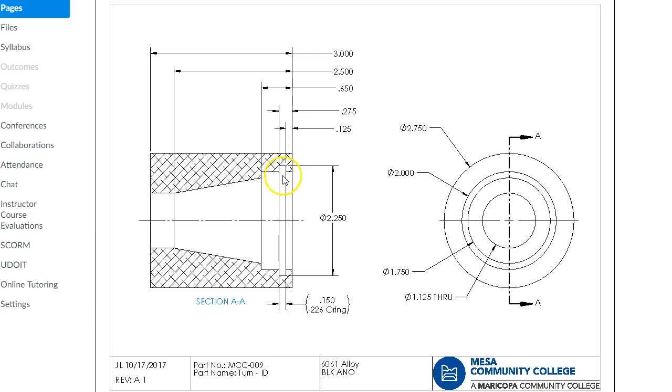I made up a turn part for assignment 9, pretty much a tapered through bore, outside diameter 2.75. First step is 2 inch, the 2 1/4 to the O-ring, and the O-ring is just for reference. Pretty much we're going to do the facing operation, center drill, drill through, then start boring out the internal geometry, and then last will be the O-ring groove.

So two things we need to be aware of is we draw the geometry in the normal coordinate system XY, and let's go ahead and generate the first part. And I showed you the offset lines and being able to generate that rectangle, treat it as a different level, and then trace over top of it at the end of the last video. I still lean towards doing the point coordinates, or at least that makes more sense to me.

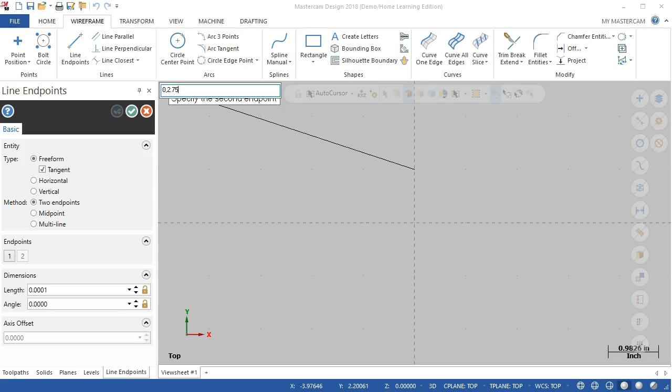So one of the things to be aware of is that once we activate the lathe, then the coordinate systems shift to a D for diameter and the Z direction. So to contrast those, we're going to start at 0 and let's see, 2 inches for the diameter, 1 inch in Y. And then 0, our OD was 2.75 divided by 2. So that gets us to the start. And we would go 1.375 comma minus 3.

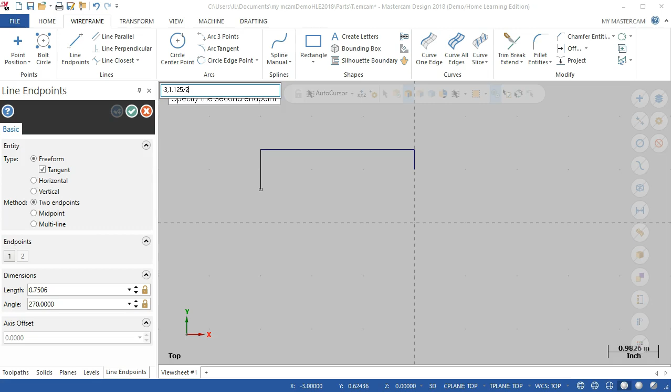Oh, got those reversed. Alright, so in point, we'll try minus 3 comma 1.375, and then our endpoint would be minus 3, and we have a 1.125 for a bushing. I didn't call out the sleeve bushing, but it has a press fit, so 1.125 divided by 2. Okay, so we'll go ahead and accept that.

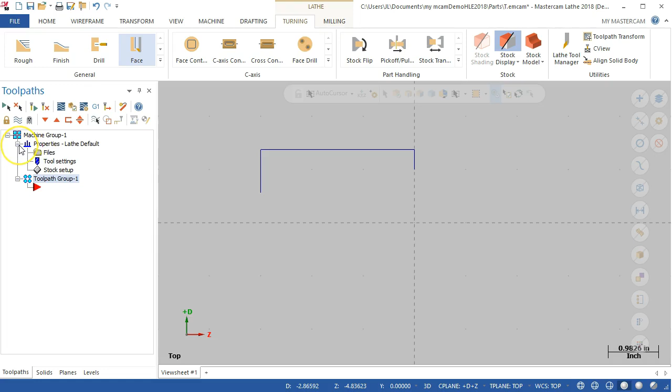Now in contrast, if we go over to the machine, notice that we're in the top XY, go over to the machine and we pick the default lathe, that the coordinate system shifts to the diameter and the Z direction. So all of a sudden our coordinates are changed, well, translated. Anything that we would put in, we now kind of have to reverse.

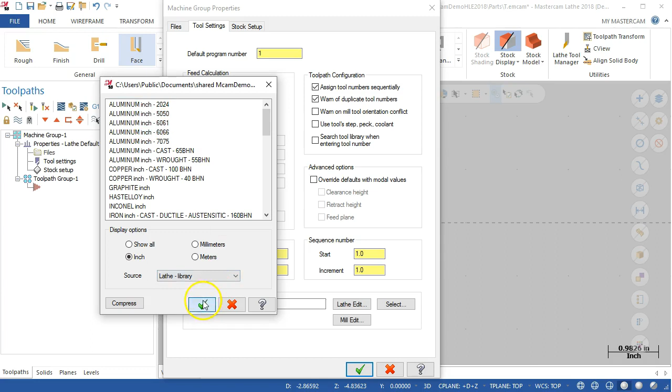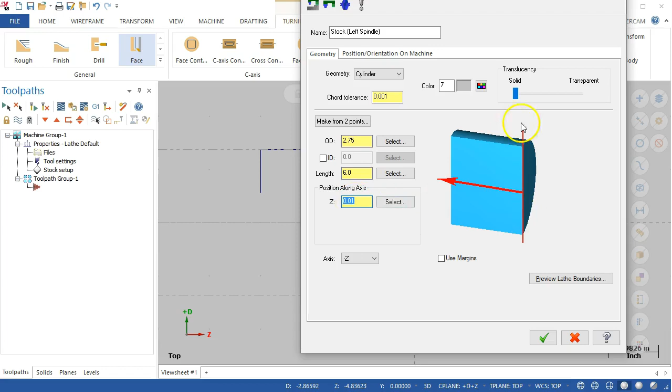Alright, so program, assign tool number sequentially, 1 and 1. Going to select for aluminum. Oh, I can go to lathe library, they should be pretty much the same, but okay. And I still have to create all my internal geometry, but I have enough of the geometry created to get a good start. Alright, so 2.75, we're going to increase some distance. Position along the axis moves the stock out some distance. And then position 2.75 and Z location for the jaws minus 4. I'm going to go ahead and accept that.

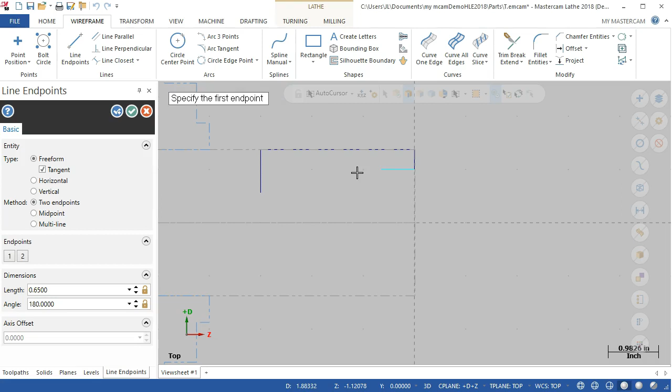Alright, so if I go back into the wireframe and start with the line, I'm putting in the D value first, and so we're going to be at 2 inches on the diameter and 0 on Z. So that shows me my starting point. And we'll stay at 2 inches minus 0.65. Okay, go to the end point, and then we're tapering down to the 1.125. And it is back minus 2.5 inches. Okay, and then we can just connect those two endpoints.

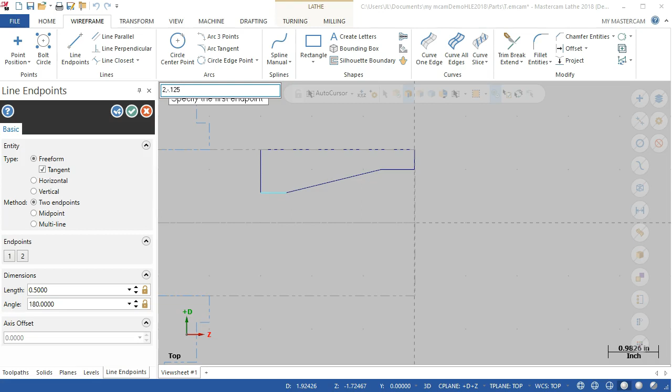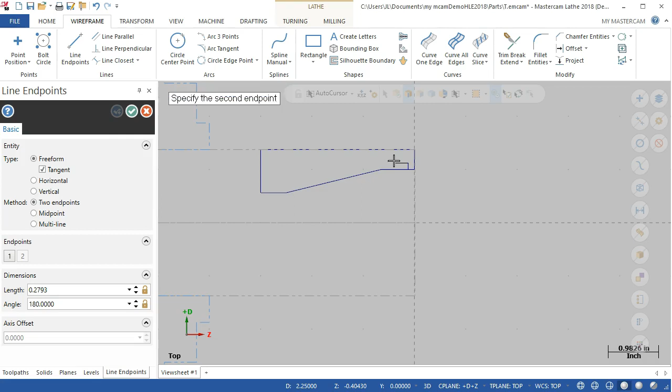All right, my next for the O-ring groove, then we'll start at 2 inches on the diameter, minus 0.125 in Z. All right, and then we'll be at the OD of the O-ring, 2.25, and it'll stay at minus 0.125. Pick up the next point, 2.25 minus 0.275. And apparently I got the snap on. All right, so we're back to 2 inches on the diameter, minus 0.275.

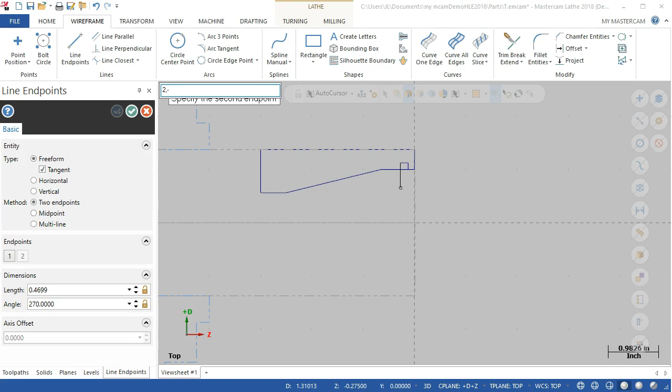All right, I'm not worried about trimming that out, because that's going to be a separate operation. I'm not going to have the boring bar try to get into that geometry. So let's see, under view. Well, we're not snapping to the grid, so I'm not sure what it was jumping to. Okay, well, we have our geometry created.

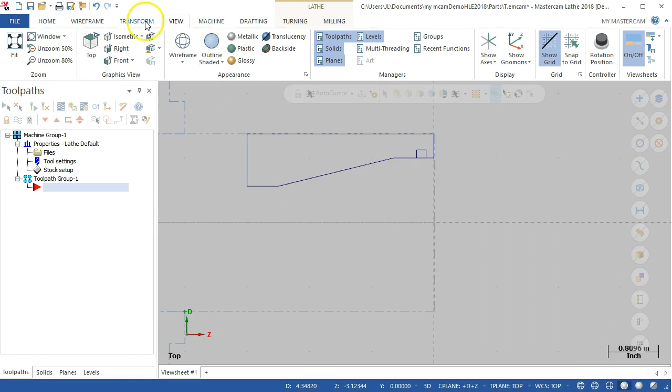So we're back over to the machine and over to the turning. And with most all of our turning operations, we're going to face first, and that's going to establish our Z level. So tool 1 can stay with the 80 degree. Feed rate will drop down to 5 thousandths inch per revolution with a maximum of 2000 RPM.

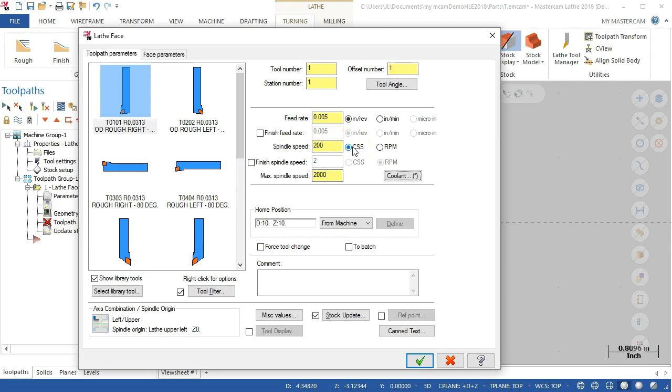And constant surface speed. And then face parameters, entry amount, basically can stay with the defaults, 10 thousandths, overcut, retract, and stock to leave is 0. Okay, so it comes in, goes out, does the retract.

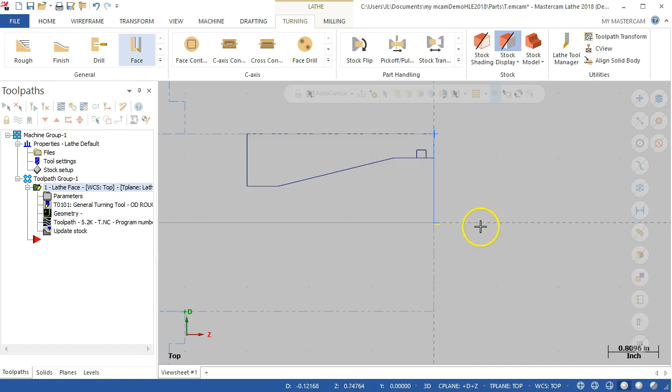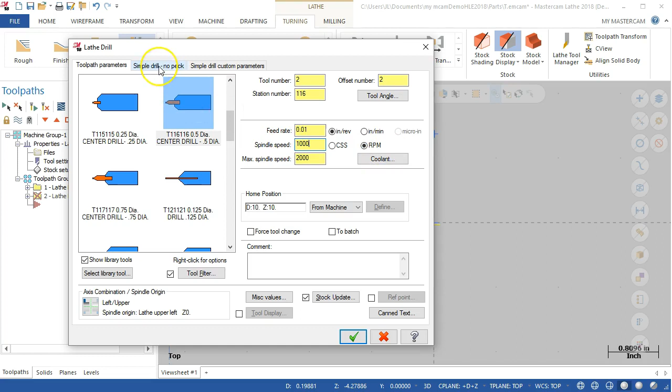We'll go ahead and include the center drill. So in our drilling operation, spot drill, there we have a 1/2 inch center drill. Going to stay with the max spindle speed of 2000 RPM, 10 thousandths inch per revolution. Set the constant spindle speed, or RPM, to 1000. So simple drill, no peck.

In general, I want a 1/2 inch. I'm going to be close to a 1/2 inch depth to generate a 1/2 inch diameter with a center drill. Okay, drill point is at 0, 0, clearance 0.25, and retract to 0.1. And with those values, should be able to just do the straight plunge.

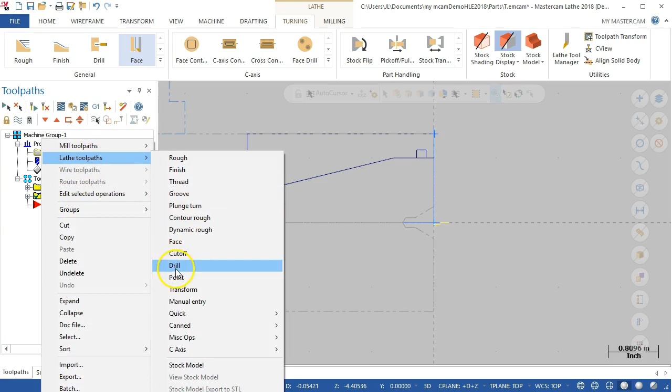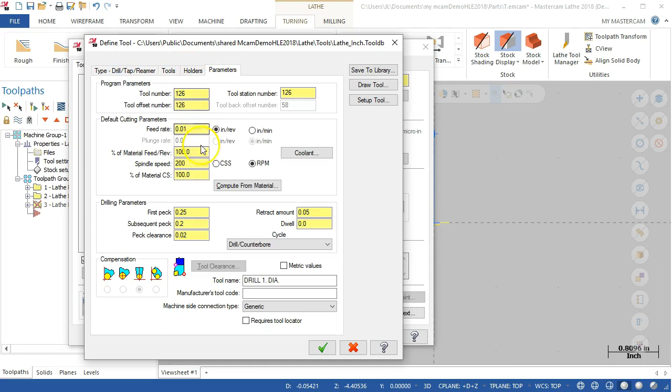Going back into drill, let's go ahead and look for a 1 inch. So 1 inch diameter, and we can look at the tool geometry, tools, holders, parameters. All right, so this is where everything originates from. This is going to be a pretty large drill without a pilot hole, and even though we have 1.25 or maybe a 1.125 drill, since this is going to be for a bushing, I am going to want to finish bore to that geometry.

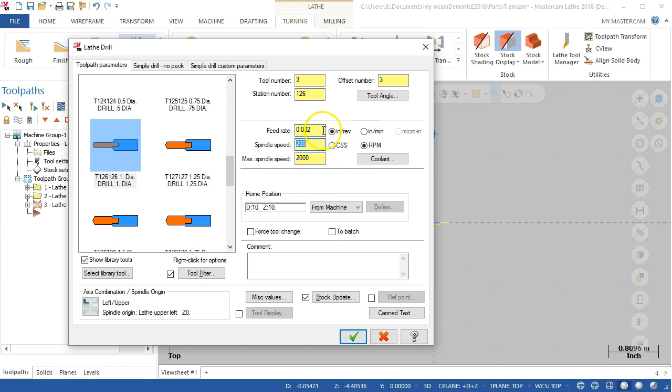So spindle speed set at 200 RPM, 2 thousandths, and simple drill, no peck. We're going to change that to be a peck. First peck can be 50 thousandths, and each subsequent peck 50 thousandths. And we'll give it just a little bit of clearance. Depth, we know we're going to 3 inches. So let's go 3.5 inches and we'll see what that gives for clearance. I'd rather overrun a little bit.

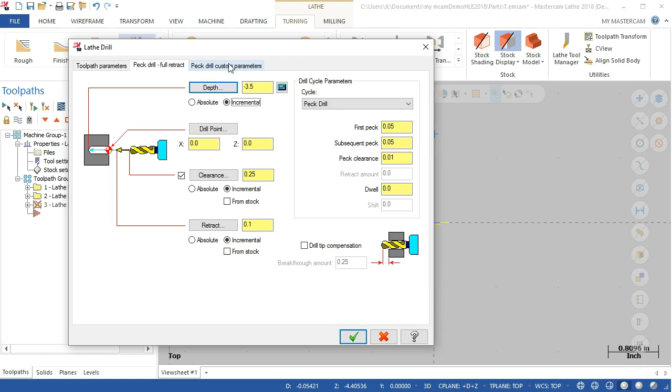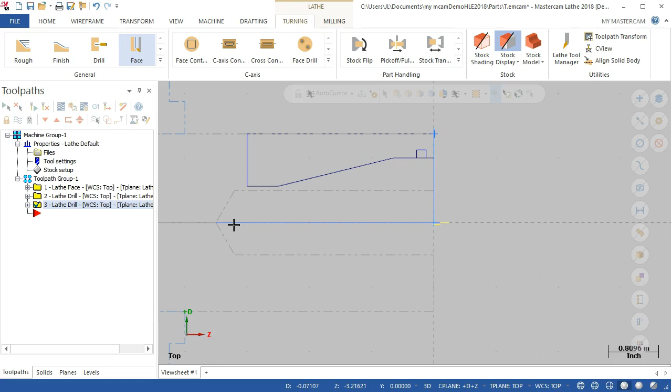And then in this situation where we're going to have enough through bore to have a long piece of stock to bring this out, then we would not necessarily need the center drill with the remaining drill point at that end, and no custom parameters. Right, so that gets us into our geometry, overruns it just enough. We may decide to pull that back again because of the drill point and how many of these we're going to run.

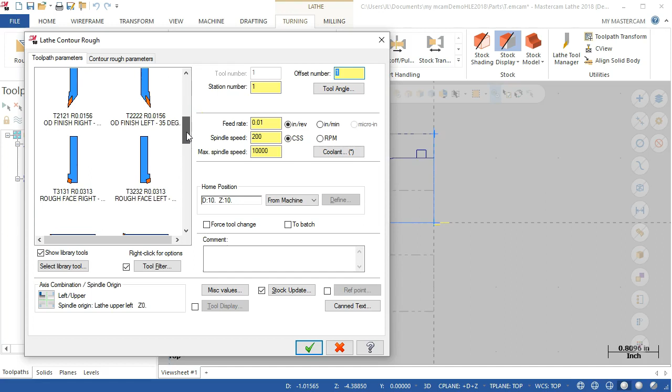Alright, lathe toolpaths, we're going to contour rough, and you see why we left the line in place. So that gives me my position. We need a boring bar and we're looking for minimum diameters. Alright, so going 3 inches deep, let's go for the minimum 0.75 diameter. 1 inch is pretty snug. So let's give ourselves a little bit of room to maneuver. Feed rate 5 thousandths, constant surface feed at 200.

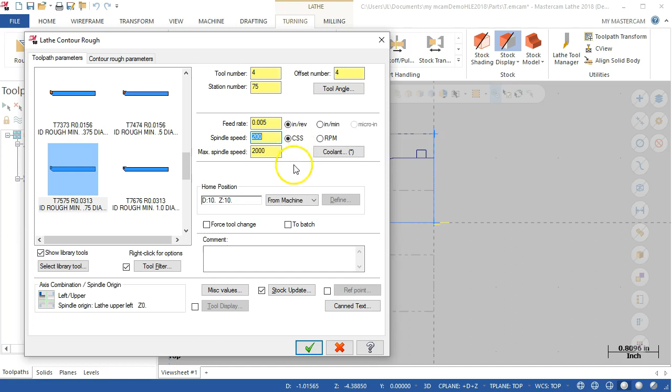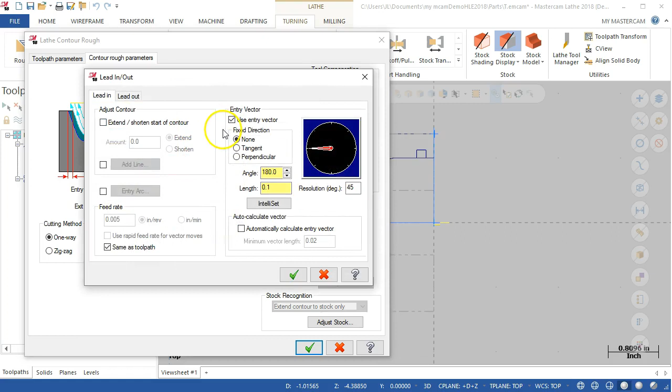And then the roughing parameters, stock to leave in X, let's bring that down to 5 thousandths. 5 thousandths, minimum cut could be 10 thousandths, minimum error. And entry amount, exit amount, we want to overrun that just a little bit, but let's check the lead in, lead out. So I haven't had good luck with the entry vector and exit vector on the ID geometry. So I'm going to extend the lead in just by 20 thousandths and extend the exit. Alright, and we're going to see what that gives us.

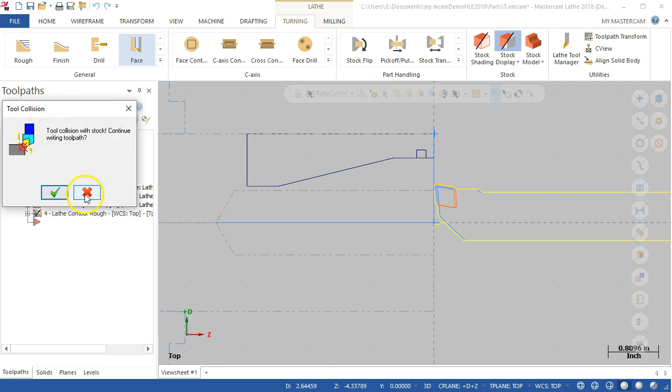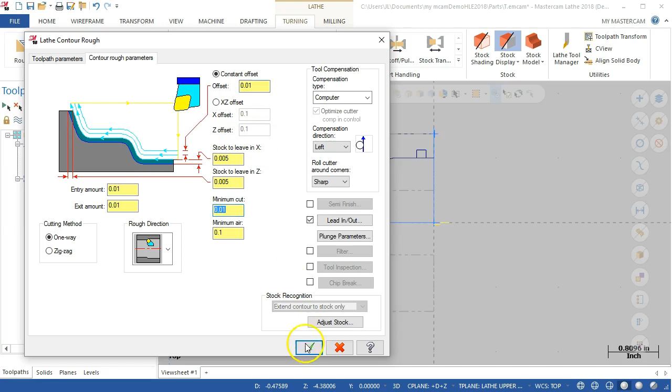Alright, so entry and exit amount, that should be taken care of in the lead in, and shows a collision. So yes, I want to save the operation. So I'll give it just a little bit more. Constant offset, well, 10 thousandths on the constant offset, that's for the material. So let's drop that down, and then we'll regenerate the toolpath. Alright, so I have a little bit more lead in. At the tail end, it's going to overrun some amount so that when we go in to finish, I can at least get past that point.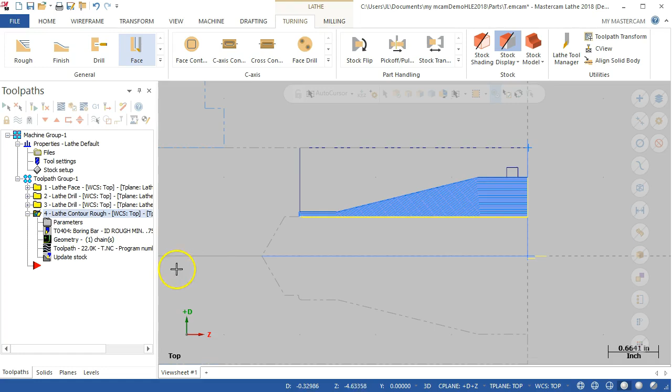The other consideration is when we go to do the grooving tool and part this off, if I want this to go into the groove as opposed to pecking through, once it hits that 20 thousandths, that's pretty much going to jump off. So yeah, we'll have to see what it does with the machine for that run. Alright, so let's turn off the display. We're going to go back into the lathe tools, and this is going to be a finish pass.

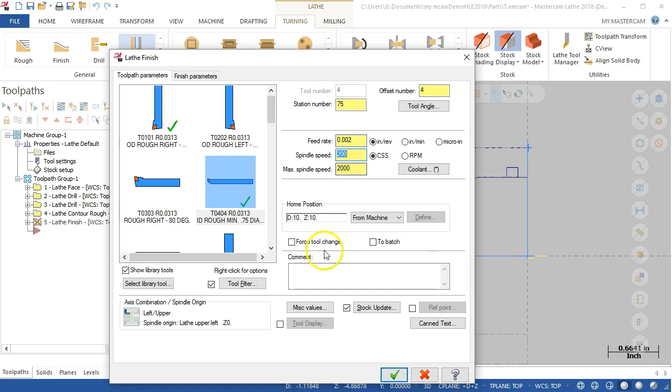Pick up our chain. We're going to stay with the 3/4 inch, 2000 max spindle speed, 200 surface feet per minute feed rate for a finish. Let's go down to 2 thousandths. I'm pretty much jumping over these because there's not anything in miscellaneous values that I'm concerned with. Letting the stock update is fine. Any canned text that we would want to put in after the fact, we could put in after those operations.

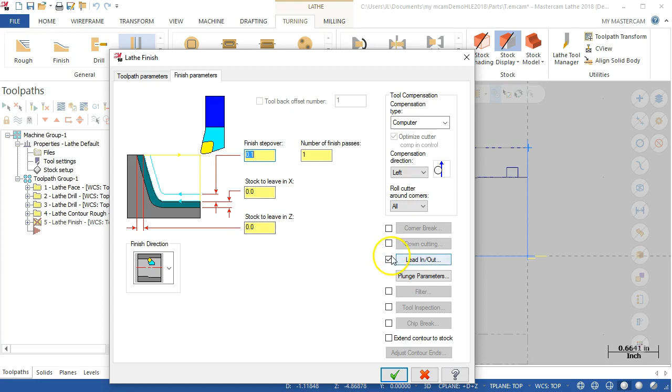So finish parameters, finish step over, number of finish passes, stock to leave 0, stock to leave 0. So if we wanted spring passes, we could put those in. And I'm going to go back to my extend and lead out to be 10 thousandths on the finish. And we'll see what that looks like. Alright, so geometry comes in. And that gets us ready for the grooving tool.

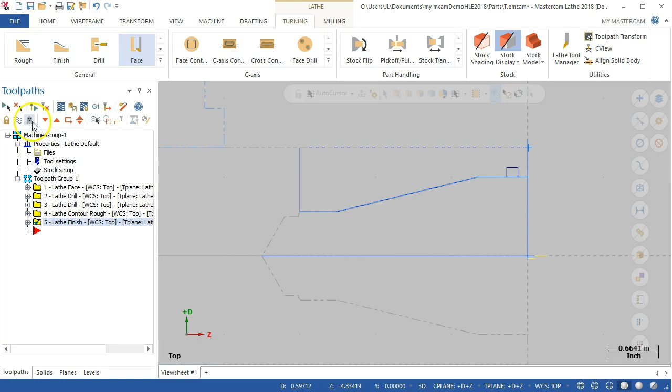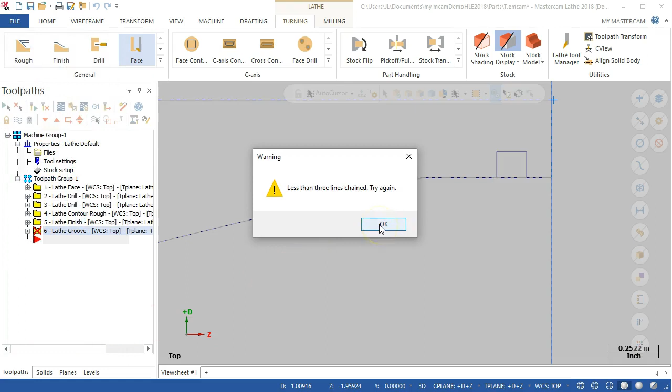Alright, so lathe tools, going into the groove. I'm going to go ahead and tell it to do 3 lines. And we'll start, go to the next, go to the next. Less than 3 lines chained. Interesting. Oh, select the last entity, chain groove rectangle. Alright, so always read the tooltips.

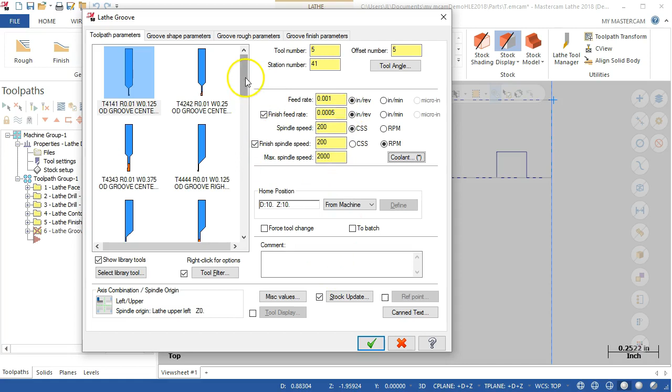Alright, so feed rate of 2.5, we're going to drop that down to 1 thou. Finish feed rate of 0.5 thou. That's pretty good. Good size diameter. Spindle speed 200. Finish speed 200. Max 2000. We need to pick an OD groove tool, and we'll go with an 1/8 inch. So width 0.125.

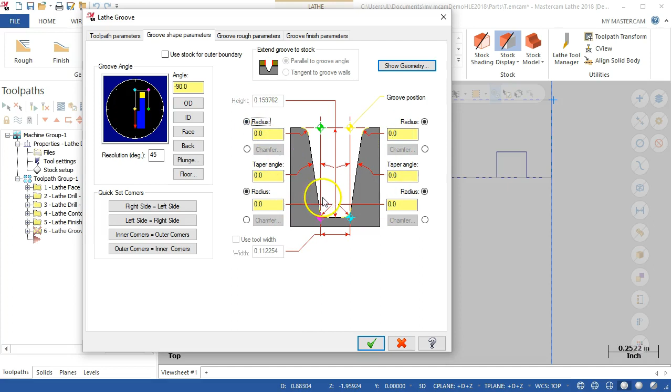Okay, so groove shape, stock for outer boundary, no radiuses, no extra internals. We're going to rough bidirectional alternating, so it'll go in the center and then it'll step to the outsides. Percentage, stock to leave in X, 5 thousandths and 5 thousandths. Feed rate on the retraction. Plunge feed rate 2 thousandths, that's fine.

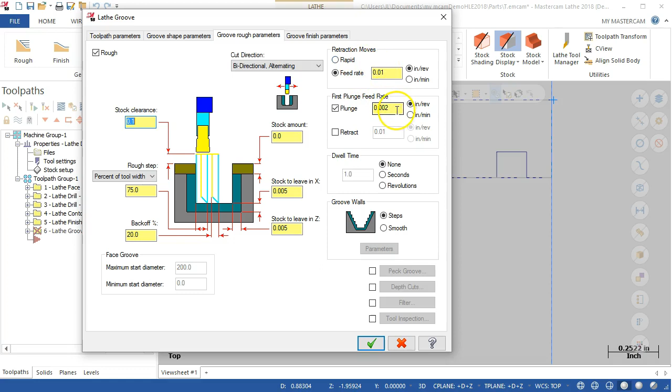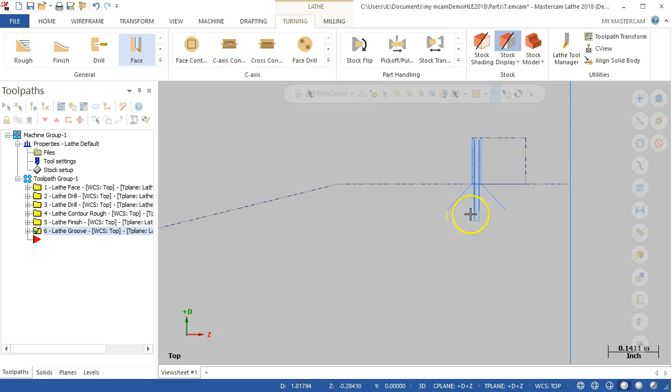And then the finish parameters, 1 finish pass, step over amount, no stock to leave, no stock to leave. Really stay with the defaults. Alright, so basically we touch off on the leading edge, and this is calculating for the leading edge of step in, step over, come in, and come back out. So basically on that tooltip. Alright, go back to the fit.

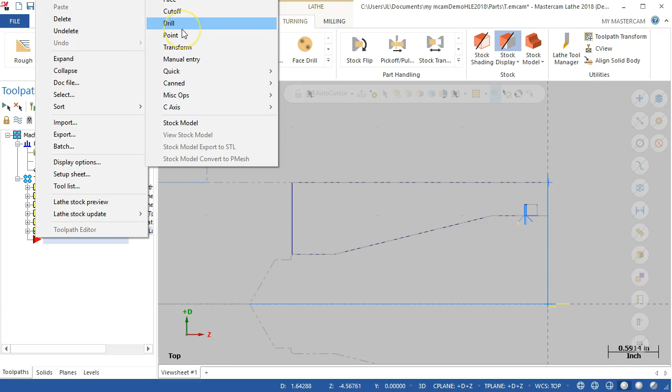And let's see, last one is to go, we're going to stay with the OD stock. And I want, as far as the grooving tool, 1/4 inch, let's stay with the 1/8 inch. Max spindle speed of, considering the grooving tool is going to be prone to chatter, 1,000 at the most. Since it's at 1 inch, it shouldn't get there, but would rather limit it.

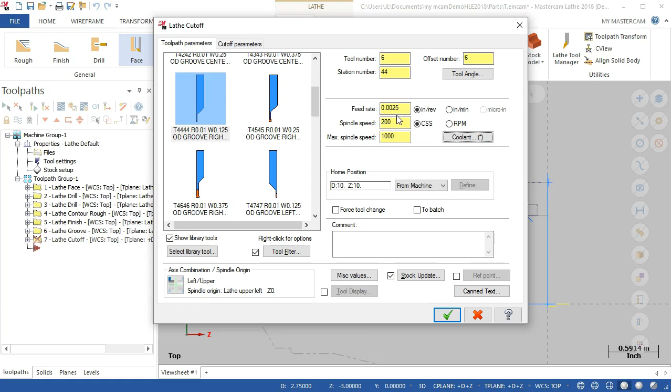Cutoff parameters, entry amount of 100 thousandths, retract to the radius and incremental value, 100 thousandths. Alright, and then somewhere in here, X tangent point, back face of stock at 0, no corner geometry. Now let's check the lead in, lead out. Gives us the direction vectors 90 and 90, so that's okay.

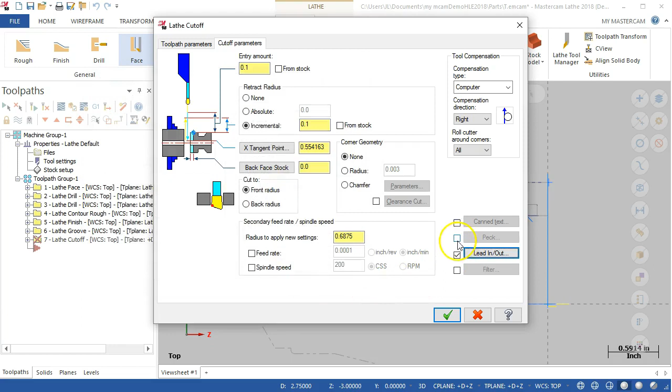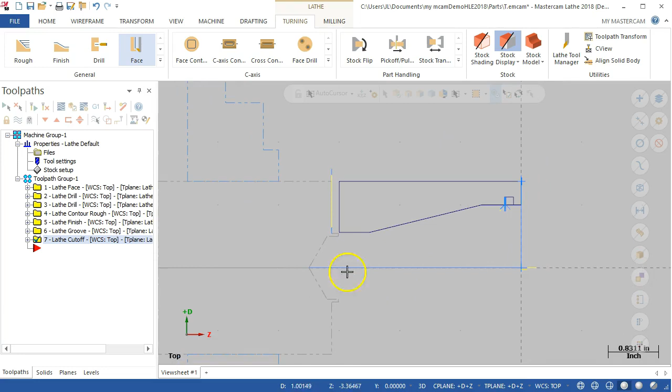And then I do want it to peck, so peck depth, we'll go with 30 thousandths. Okay, see what that looks like. Right, so again, touching off on the leading edge, pecking through, parts the tool, and then we're pretty much ready to run one of the simulations. Alright, so let's save this.

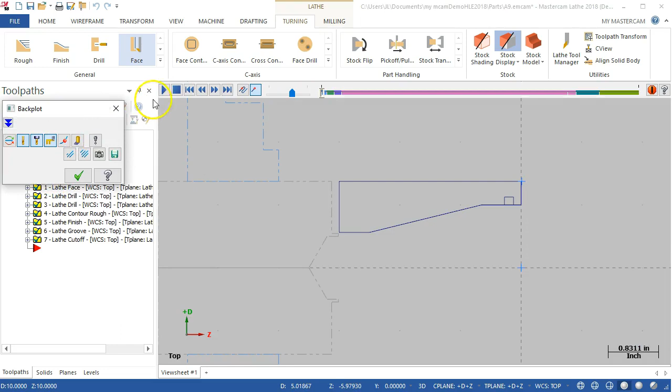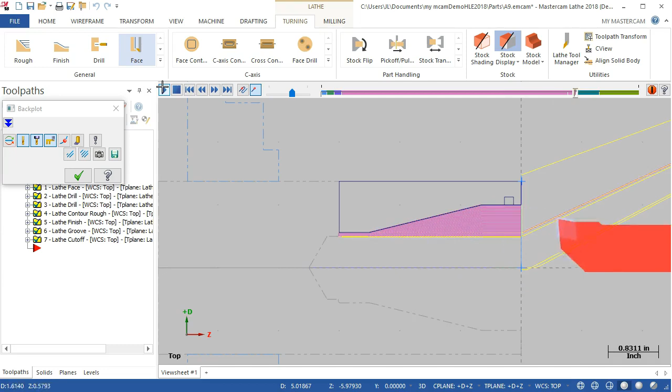And we'll go with the backplot first. Oh. And make sure everything's selected. Okay, so facing goes with the center drill, the drill. You can see each of the boring operation. And then the finish pass, grooving tool, and part.

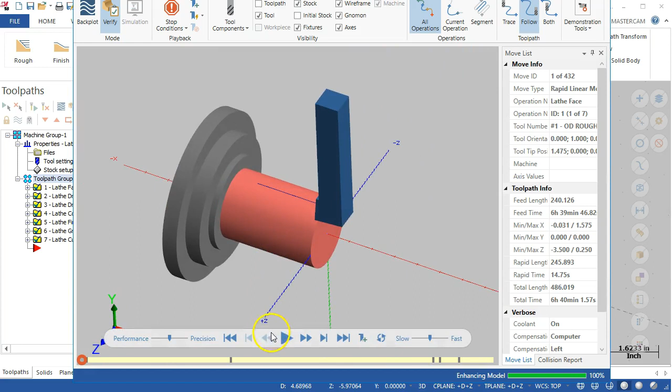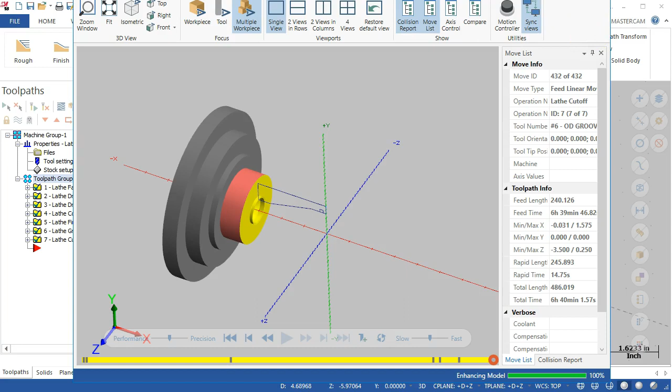Alright, in contrast, when we go over to the verify, we're looking at this as solid. Okay. And that'll give us our preview of the stock. Everything else needs to take place at the machine with the cutting conditions.